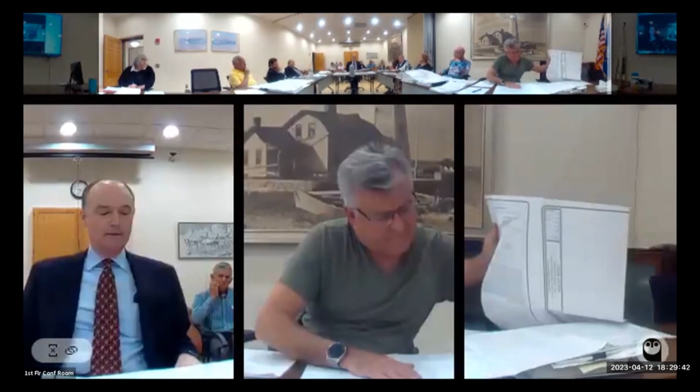By your testimony, do the neighbors have a right to park two in the right of way and two on their yard? No, two total, in the right of way or anywhere on the lot, and there's that clothesline area that may have access. Aren't there two houses that have access here? Only one of them is benefited by the right of way and the deed language, the deed restriction I'm discussing, number 115.

Okay, based on that, is there anybody else that would like to speak for or against this application? Do we have anybody out there? Any hands waving for or against? Before you close it - yeah, I'm not gonna close it yet, I just want to make sure.

Mike - oh, hang on. Jeff, hello Jeff? Did he want to speak? Jeff, go ahead and unmute. Okay, hi guys, thank you all for your time.

The one thing that has always been a little bit of a problem is, and this is me, not an attorney - the shed was never supposed to be there. It's not permitted, it's on my property. I got told for years that this was not on my property. You're basically saying you can move it two feet away from my property. The shed shouldn't be there. Take the shed out and move the septic system back where it belongs.

Or let them park back there. He doesn't need another shed, he's got a new garage underneath his house. Who's speaking? Why does he need a shed? It's going to be - you can't put anything mechanical in it because it's going to get flooded. So everything can move into the garage now. The shed doesn't need to be there. It's not been permitted, it's on my property.

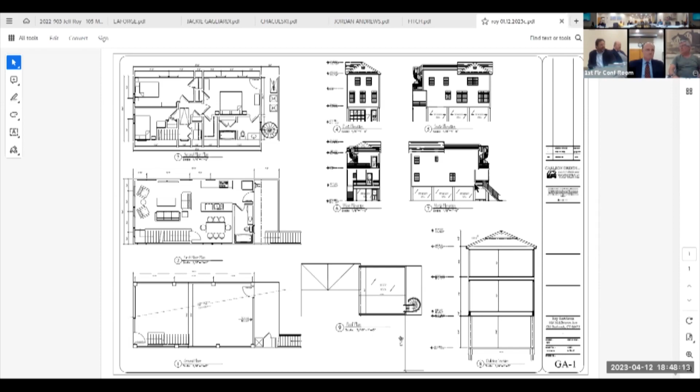So what do you guys think? Is that the just deal? I think having the formal drawing documenting what the changes are, and having the letters - we've got the letters - what's the downside?

I'll be in a minute. That gentleman here represents the abutting property owner. Right, they're not in favor of this.

If you don't show them and they sue you, like the ZBA, they're gonna say, like the first time, have you had enough time to prepare? I'm sure you're not pre-deciding the other side. Absolutely not pre-deciding.

I don't know if that got in the record. The other side could lose and they could take an appeal as well. Absolutely, but you had a concern that you didn't have enough time to prepare, and I agree with you.

That's okay. We're here to hear everything and then make a decision, whether we agree or not. But if I'm sitting in your chair and your client doesn't get his way and he sues, wouldn't you use that?

They had an opportunity to extend this a month so we could see what they're gonna build, and they denied us that opportunity. Capiche. We have a precedent where, with drawings, they said they were gonna do one thing and they did something else. It's the other side of the fence, I guess. So that's the only reason.

And to me personally, Mr. Chairman, may I? Yes, ma'am. I think your counsel will agree with me that it's relatively standard to condition an approval on a revised plan consistent with what we're stating. And if for some reason what we produce isn't consistent with what we're saying, then the approval doesn't happen, because it's a contingent approval. It's contingent on us giving you a plan that says exactly what we're saying it's going to say.

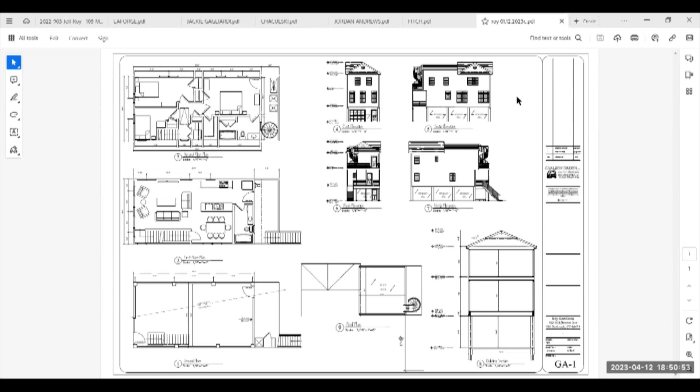If the board is inclined to deny the application based on that, then obviously we'll be open-minded, but in fairness to the applicant, we've been here 3 times. In fairness to everybody, I think that not only does the public have the right, but you chose not to be here.

This is on a small lot. Neighbor's very concerned, and if this neighbor's concerned, there might be other neighbors that are concerned. We want to turn every stone to make sure we've covered our bases, regardless of which way it goes. We've just had some unfortunate experience with drawings, and I know I would feel better if the drawing depicted exactly what we were building, so that the neighbors could physically see exactly what we're building, and we don't have a mismatch with what we're asked to approve, because we've had a problem in the past.

So I would feel more comfortable with that, and that's why I would prefer not to close public comment, but give you the opportunity to correct the drawing so that if we come back showing exactly what it is we want to build, we give the public one last opportunity to view it before we vote on it. I don't think that's unreasonable. I'm merely stating our preference. So as Joe said, if that's what the board feels comfortable with and that's what's going to be required, then obviously we'll accommodate for that.

Unfortunately, we've only used 29 days of our 30, about 65 days total, so we have adequate time, with your consent, to continue the hearing. Yes, that's the key word - with your consent. Yes, as Joe stated, we will consent to the continuance based on the board's request.

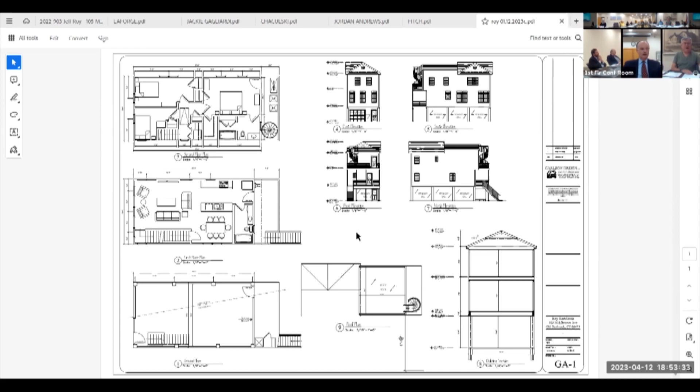If I may, one thing - there were a couple of comments about where to park cars. I don't think it matters what they think about that. They're the servient estate, they don't get to decide where the cars are parked. There is on the deed, however, a right that runs with the land on an area to use, maintain, repair, and replace an area on that western end that's not depicted. I leave it to you if they're going to redo sketches, because that's unclear as to what that may be impeding. My biggest concern now is the actual physical drawing of the property, so that the abutting neighbors have an understanding of what's actually being built on their property.

I think we could all agree that parking is a problem. Yeah, of course. And if the deed doesn't have a metes and bounds description of the parking area, any sketch would just be a guess. Yes. Well, that doesn't help, but okay.

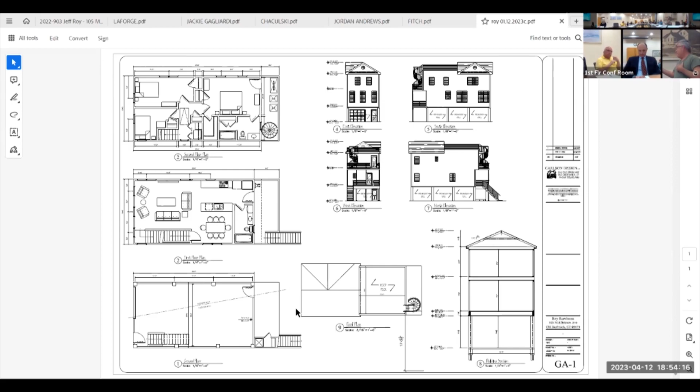So I guess, do we need to make a motion to extend this, or can I just? Yes, you do. So I'd like to make - I move that, given the consent of the applicant and given the withdrawal of the current plan, that this be continued to the next regular meeting of the Zoning Board of Appeals, and that the revised drawings be submitted in the required time in advance of that meeting. Second. All those in favor? Aye.

And we'll also - am I correct, you also need a letter from their attorney stating that they want to request the continuance. Yes, I was going to say we'd like to have that for the file. Absolutely, I appreciate that. Mr. Roy, we appreciate that we understand how you want to get started on this, but I think we need to dot the i's and cross the t's on this, just so that the neighbors can see it. This is the first large structure going up in that area for FEMA compliance, and I think we should dot the i's and cross the t's.

With that, we're going to go. Thank you, thank you all. Chuck, yes, Jeff would like to say something. Jeff, yes, it's Jeff Dooley, 103. Thank you for being fair. That's all I've ever asked. Thank you very much. You're very welcome, you're very, very welcome.

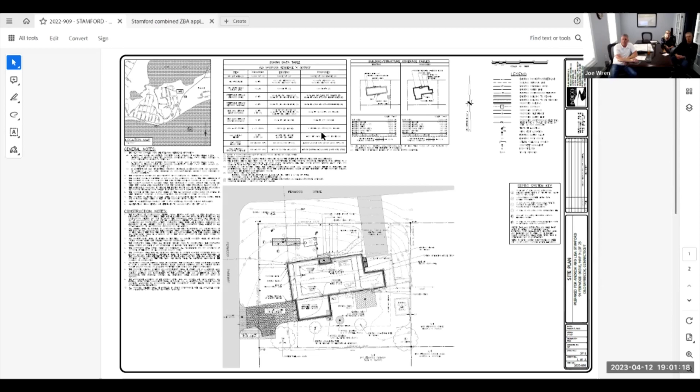Before I open the application, I wanted to zoom in on the plan and show you some of the merits of the application and some things that we were up against. So again, this lot is a corner lot, so as you know, we have two front yard setbacks. On the western side here and the northern side here, we have the 25-foot front yard setback. Corner lot, so we have two other yards, basically two sides, but same as rear, 15 feet on this side, 15 feet on this side.

Existing conditions of the property: there's a paved, steep driveway from Fenwood Drive on the north side of the property here, and there's a crushed stone parking area you can see in the back here off the Fenwood Parkway side. There is an existing 10 by 12 shed here, 120 square feet, but it's within less than a foot of the property line. That is proposed to be removed, so that nonconformity will be eliminated.

Also on that side of the property, you can see with this hatching, the existing house comes over that setback line, both on the front setback here and on the side setback. That area is an existing garage that is being removed basically, so the east side setback is being eliminated. Currently it's 10.4 feet from the overhang to the property line, and that is becoming conforming to 18.2 feet, so almost nearly an 8-foot increase on that sideline.

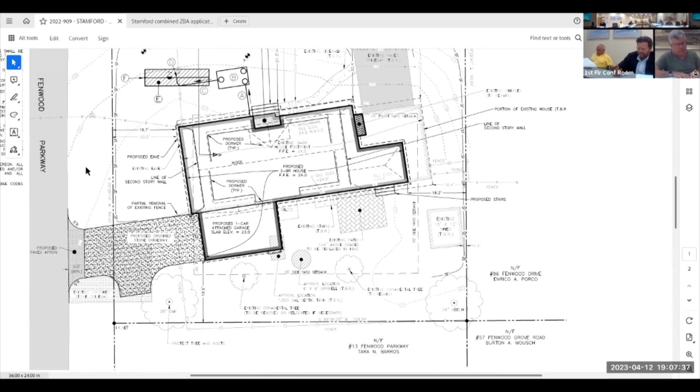When we were talking about an 8 inch eave - I thought that under 12,500 square feet, eaves don't count in coverage. They don't count in coverage, but they do count towards setback, so that's why I was mentioning the setback. They do not count towards coverage, and it wasn't included in the coverage for this application. Okay, just wanted to make sure. Thank you, sorry for interrupting. No problem, you're welcome.

We have to have a 5-foot paved apron, as you're familiar with, but from there in we have a crushed stone driveway, again to open it up, reduce the runoff, and open up to infiltration. There's an existing crushed stone area here already, so it's just lengthening that slightly to get to the new attached garage addition in this location.

As you can see, that footprint was designed to be within setbacks completely. Since the garage is being removed on this side to make this more conforming on that corner, a garage was added, and this is a much less steep driveway, and it's not going to be paved.

So we feel that's a huge improvement with no asphalt, reduced impervious coverage, and a flatter, more accessible and usable driveway to a single car garage. The existing septic system is here. You can see the tank and a dry well. That is not compliant with the health code now. It's more or less original to the house, in good soil. It's been working for a long time. You can see the addition conflicts with the tank.

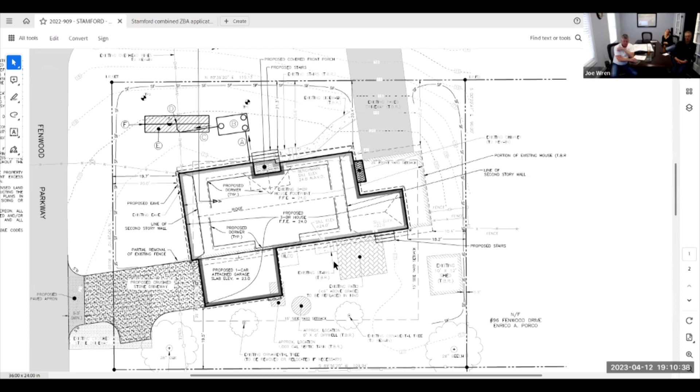Scrolling up to the zoning table. As you can see, we have everything listed for existing all the way through, everything listed for proposed. And we'll just focus on the setbacks and the coverage here, the purpose of this application.

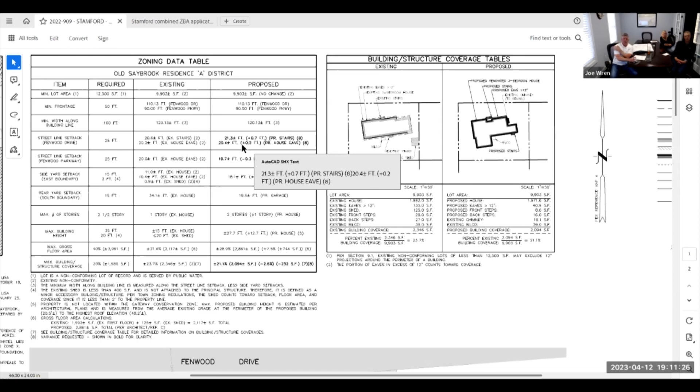So existing on the Fenwood Drive side here, you can see that we have 20.6 to the existing stairs, 20.2 to the eave of the existing house. What's being proposed is 21.3 to the proposed stairs, so plus 0.7 feet, and 20.4 to the proposed house eave, which is plus 0.2 — reducing the nonconformity by 0.7 and by 0.2.

On the Fenwood Parkway side, this is the one we described earlier, this is a minus 0.3, so increasing the nonconformity by 0.3 just for the eave location, to carry that 8-inch eave around that corner of the house. And on the side yard setback for the east boundary, you can see here we have 0.9 feet to the shed, 10.4 to the eave of the house, 11 to the actual house wall.

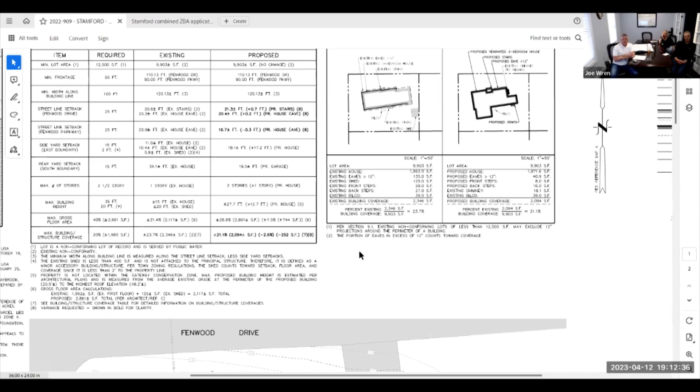And now we're going to 18.1 feet to the proposed house, so a significant reduction on that side. For coverage, currently it's at 23.7% for 2,346 square feet. We're reducing that down to 21.1, so that reduces that nonconformity by 2.6%, and 252 square feet — a 252 square foot reduction in the coverage, a reduction of the existing nonconformity.

To the right of that table, we have our standard coverage tables, and we indicate here everything that was counted, included and excluded. You can see everything itemized in the list, where we came up with the 2346 and the 2094 and the corresponding percentages of 23.7 to 21.1.

I'm going to switch the share and bounce over to the application, so we can discuss that and just right down to the variance table.

Now, I talked to Chris Costa about this because I wanted to ask for, or originally requested, 10.7.2 or 10.7.1, whatever those are, the 10.7 ones, because we're not fully demolishing this house. We're only taking it down to the foundation, utilizing the majority of the existing foundation, adding a small addition, removing part of the house completely.

But Chris said that in the past, what has been done in this situation is that we go with 10.8.2, 10.8.3, which are basically for a full tear down. So we did that here on the application, and that's what ended up in the legal notice. So we have 10.8.2 and 10.8.3, which are our normal variances for a tear down rebuild because of the non-conforming lot and the non-conforming lot size, since we're less than 12,500 square feet.

We have the street line setback to both Fenwood Drive and Fenwood Parkway. If you remember from earlier, Fenwood Drive gets a little better, reduced nonconformity. Fenwood Parkway is reduced by 0.3 on that side from 20.0 to 19.7. So that's the variance on that side.

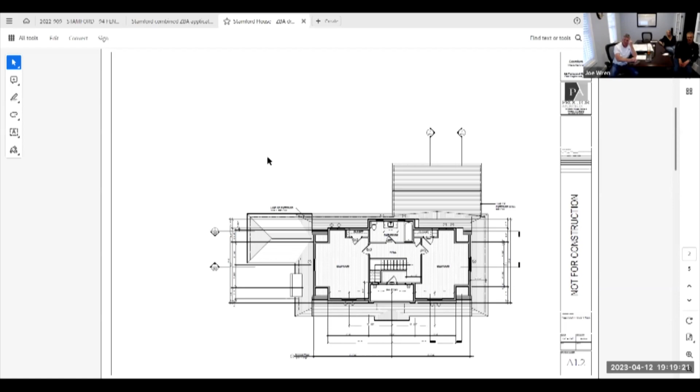Those lines are shown on the site plan, and those were made to be conforming with your setbacks. So there's no second floor expansion within the restricted setback areas. And then the overall roof plan, you can see the roof of the new dormer areas, and you can see they're pulled in from all sides, again, to be conforming.

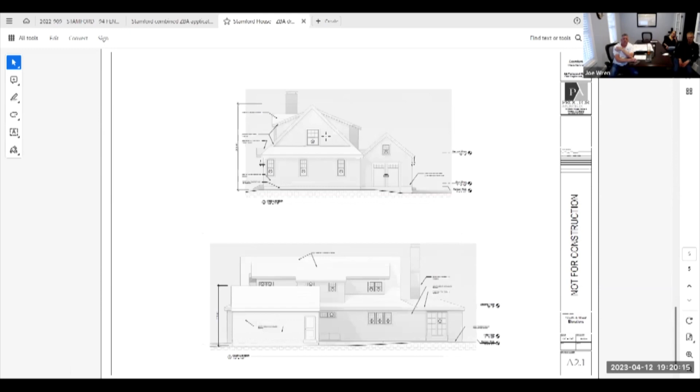And lastly, we have the west elevation. So this is from Fenwood Parkway. So the one-story garage, you can see the retracted second floor expansion area here with the dormers in the back. And on this side, you can see how all of that's pulled in as well to be conforming.

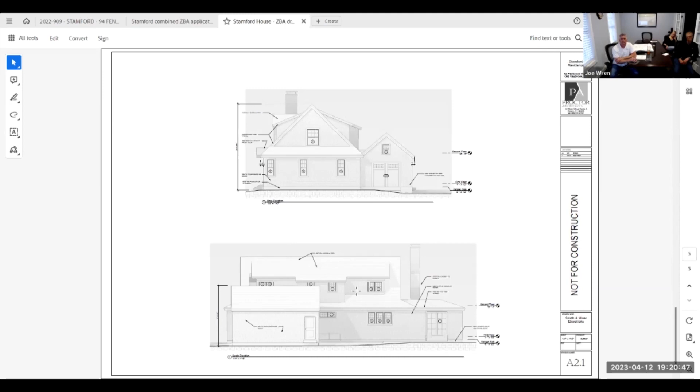And finally, the elevation from the south property line. So one-car garage, existing chimney, existing main body of the house, and then the dormers for the second floor expansion on this one.

There was one letter that was put in opposition that we are aware of. I would like to go over, I'm sure you have a copy of that. So it was submitted. I'll read that in, don't worry, okay? I'll read that in afterwards. Okay, so if you want to read it in afterwards, I would just like to go through that letter. Just you want me to kind of read it? Would you like me to read it first?

Sure. Okay. April 1st, 2023, from Richard and Susan Strauss, Town of Old Saybrook, Zoning Board of Appeals, 302 Main Street, Old Saybrook, Connecticut, 06475-174. I have attached a communication regarding the Wednesday, April 12th, 6 p.m. agenda item 20/23-23, Andrew and Leslie Stamford, 94 Fenwood Drive. I'd rather not alienate new neighbors, so I have kept my name off the communication. However, if required, please use my name. I have discussed this with others in the neighborhood, and hopefully they will let their consistent thoughts be heard by the Board of Appeals. I would like to thank the board for their consistent intent to keep the wonderful neighborhoods of Old Saybrook compliant and pleasant for all those who live here. My communication details are in the letterhead above, and should the board members need additional information, please let me know. Best regards, Richard Strauss. I'm going to read it now.

Interested person, written communication, Wednesday, April 12th, 6 p.m., 20/23-23, Andrew and Lisa Stamford, 94 Fenwood Drive. This house was purchased within the past year, and little work has been done to improve the home. The fact that the owners have done nothing to replace the obvious, unhealthy, and outdated septic system shows a lack of care about the neighbors, nearby protected waterways, and community. In reviewing the information regarding what is proposed, it shows changing a house which is consistent in look and design with the neighborhood homes and turning it into a large, tall home while continuing to be non-compliant with zoning. The proposed home will change the character of the area. The proposed home is non-compliant with the zoning regulations of the area, setbacks on two sides, coverage percent, as well as paving a currently stone driveway.

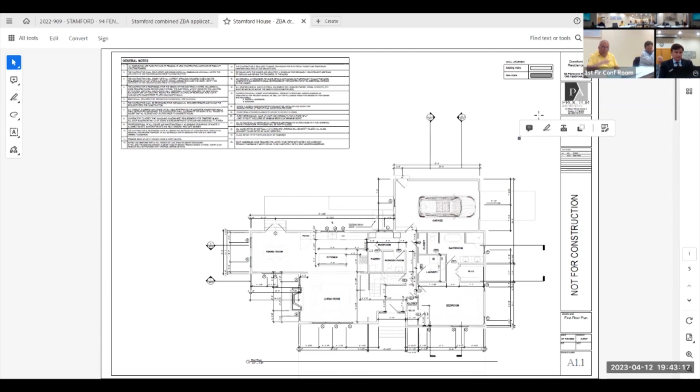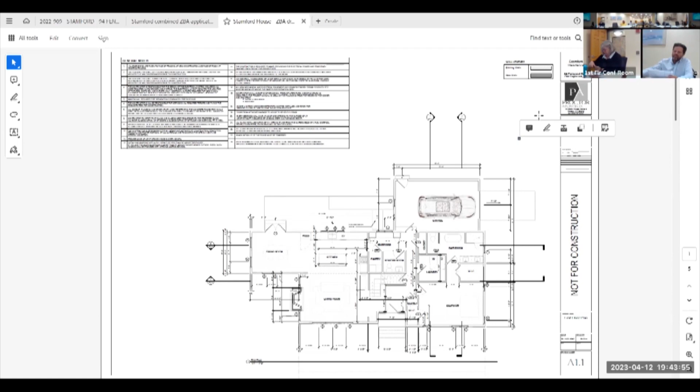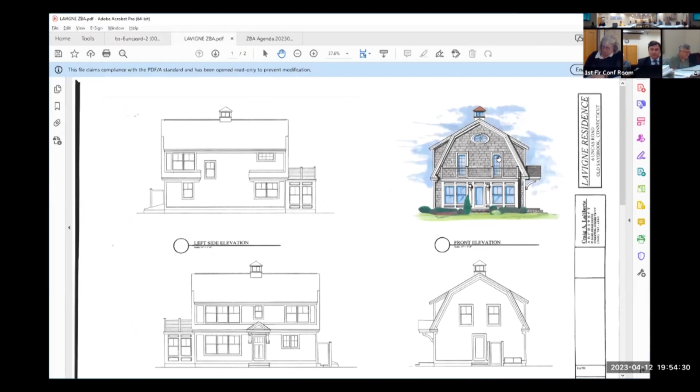For the record, Craig LaLiberte, architect, working for Kelly and Liz Lavigne. What we're doing here, as Ed had mentioned, is extending the existing walls, and that's really the reason we're asking for the variance. We're going to match the existing ridge line and the existing roof pitches.

We're going to actually extend the house, which currently is 22 feet deep. It is really squatty looking and just not very attractive. So what we're going to do is provide a 32-foot gambrel style colonial home, which will blend with the neighborhood and keep the aesthetics of what is currently existing there, only making them, I think, better.

We are not increasing any of the setback lines, we are sticking with the 9.8. As I mentioned, we're just keeping in line with the exterior walls, the roof pitch, and the ridge, so our height is not changing.

We are removing the existing appendage on the back area. The existing chimney will also go. We're going to convert to a gas system, probably.

And as Ed had mentioned, we're going to also provide the basement in the back area under the 10-foot addition to house mechanicals, do storage, and different things, where we'd have height to be able to walk down there and store things.

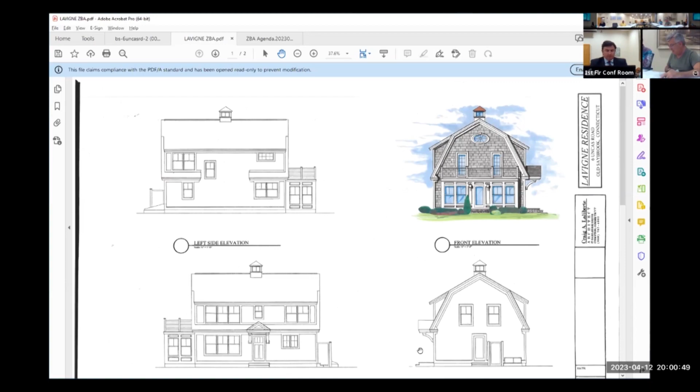I got a question. On the drawing, when I look at the proposed addition, I see a shower, the Bilco, and a door. I'm assuming since they're not on the survey— the Bilco is shown, but the others aren't, even though they're within the buildable envelope. That's all the enclosure is, a fence. I'm just trying to understand why the drawing wasn't there, and the door wasn't shown, but it's okay. And if I'm correct, looking at this drawing under the slashed area, the enclosed porch and the shower were already impeding into the setback area.

Correct. So the ask is, we're basically asking for—I don't know what the dimensions are, was it like 3.5 feet more? So that's what we're talking about. I want everyone to understand it already was going out to that part, right?

Mr. Chairman, if you took, as you're saying, most of this is by right anyway. Exactly. So if you took that 10 by 24 to make it compliant on what I'll call the west side of the house, without that, it doesn't work—you'd go partially into the driveway, or out to the leaching fields. It's just not going to fit. They bought this out in a very nice way. You can't even see it from the street.

I understand, and they've already put in a code compliant septic system, the new one, which if we try to relocate anything now, we're within so many feet of the septic system, which causes a whole other set of problems. We're not asking them to redo the septic system, which would be unreasonable.

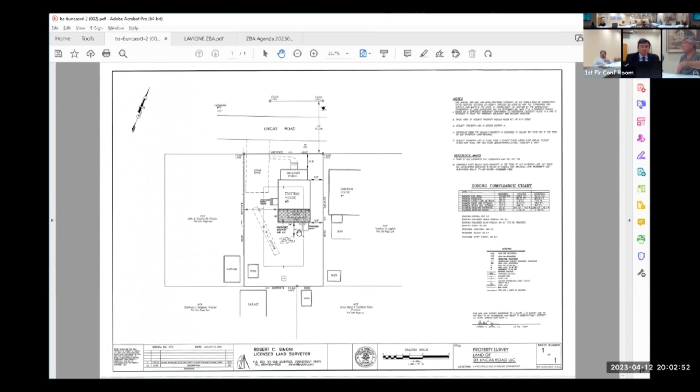Any other questions of the applicant? Hearing no other questions, I'd like to open it to public comment. Is there anybody in the room which would like to speak for or against this project? Speak now, state your name and where you live, and come on up.

Maureen Rogers, 11 Uncas Road. First of all, I fully support the plans that have been presented by the Lavignes. It's in keeping with the character of the neighborhood. I do have to mention that over the past 25 years, the property has been used, or abused, for year-round rentals. You can check police records, they've been called out many times. What the Lavignes are proposing is something family-oriented, something they can leave for future generations. I know I can only speak for myself, but I know other neighbors support the project.

Thank you very much. Is there anybody else that would like to speak for or against this application? Hearing none. Wait, one second. Doris, yeah, Doris, unmute. Doris, you can unmute. Can you hear me now? Yes, we can, Doris.